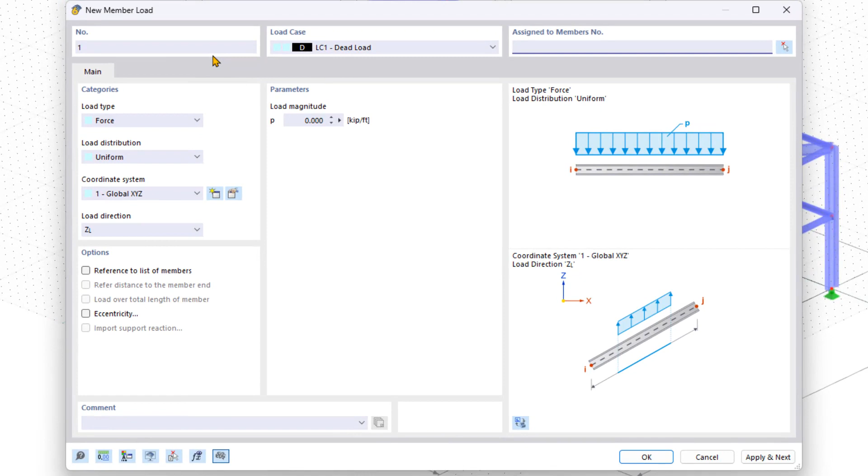You can do this by clicking the New Member Load button, and the selected load case from the list is imported into the New Member Load dialog box by default, but you can change it retroactively. In the Categories section, you can customize the load properties. There are additional options below this, such as eccentricities as well. In the Parameters area, you enter the desired load size and confirm it by clicking OK.

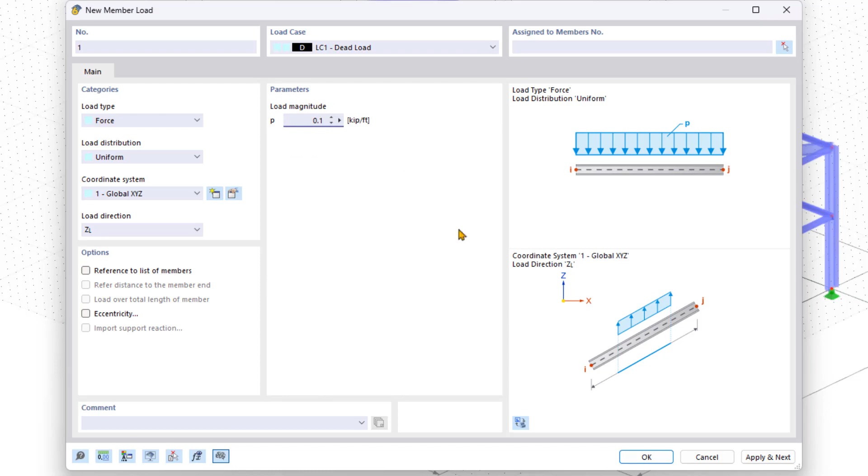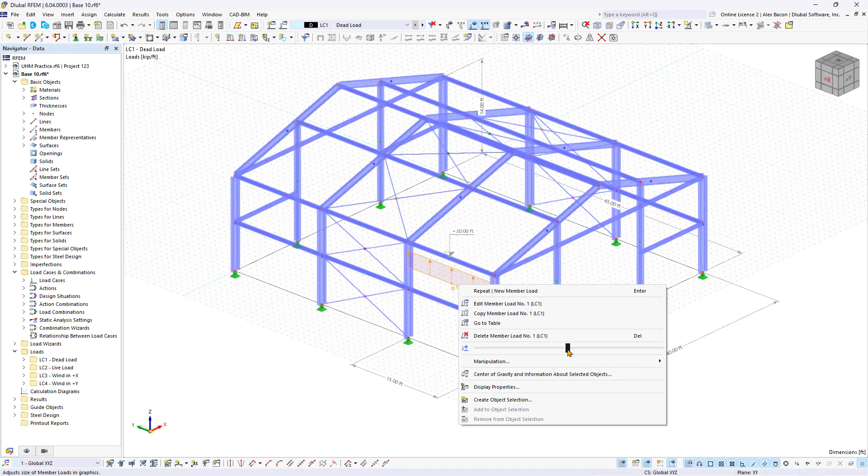Select the members in the structural model to which you want to apply the member load and confirm again by clicking OK. And adjust the display size of the load with the controller in the shortcut menu, as well as double-click on the load to edit it and change anything you'd like.

Since the self-weight load case acts on the entire model, we'll now delete the member load that we just created and use a load wizard to create several loads for the steel hall simultaneously. We can expand the load wizard in the data navigator and double-click on member loads from area load. This way, surface loads can be automatically converted into member loads.

As usual, this dialog box consists of a list of available load wizards on the left, properties and options in the middle, and bitmaps on the right. Start by selecting the correct load case from the list. Use the symbols to the right of the list to create new load cases directly in this window, or edit the selected one.

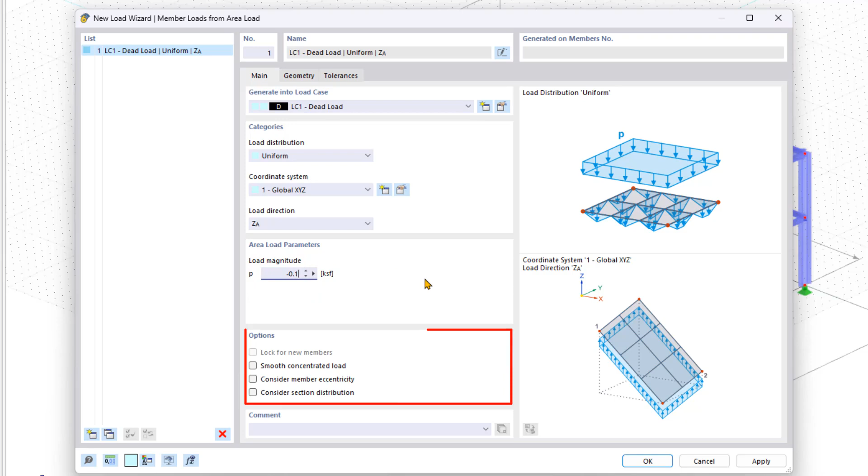In the Categories area, set the correct parameters for the respective load. The bitmaps on the right adapt immediately to the new properties. For the load size, add the corresponding value. You can find further options for this load wizard below that you can activate, and we'll leave them at the default setting. Now, we'll move to the Geometry tab.

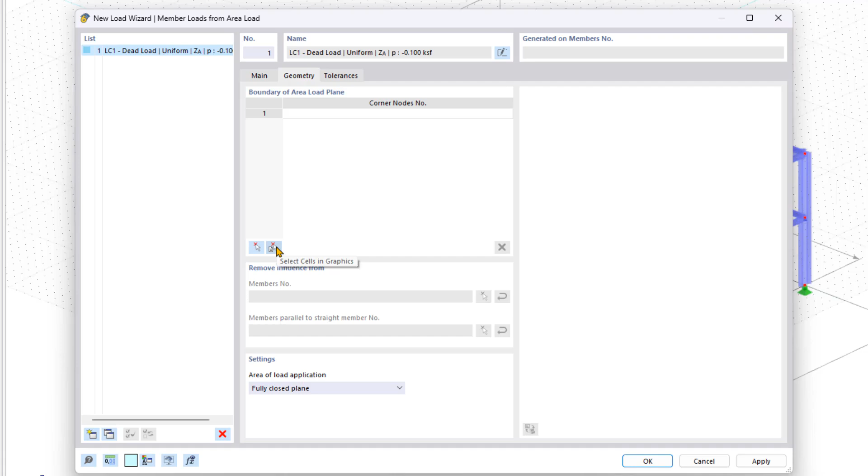You have two options for applying the loads to the steel hall. Depending on the command selected, you either define a plane via corner nodes or select cells in the graphics. Click on Select Cells in Graphics and draw a selection window over the entire structural model. You can deselect the relevant cells by holding down the Shift key on the keyboard.

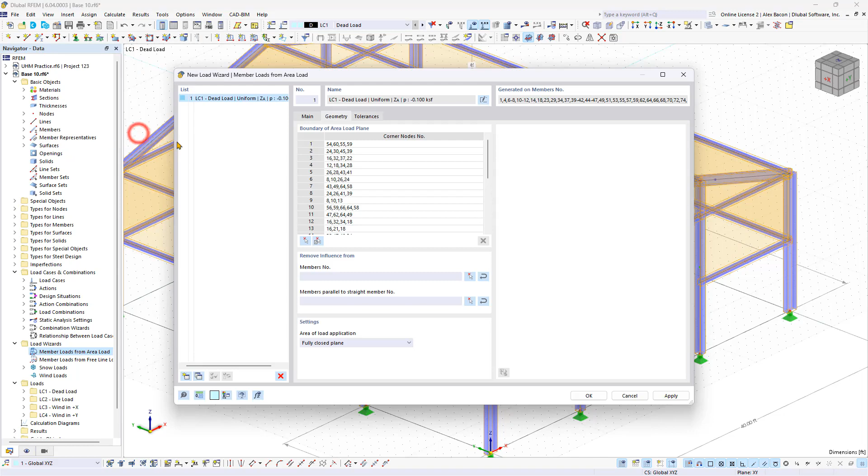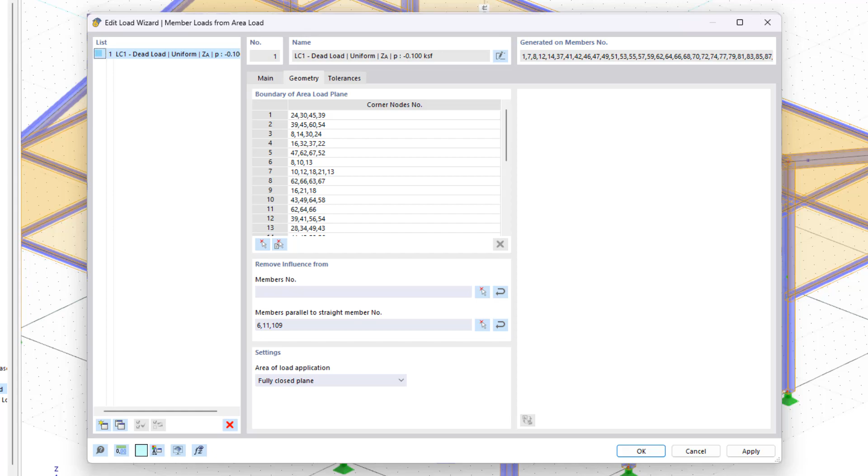Once satisfied with the input, confirm it by clicking OK, and you'll see all the selected surfaces listed. You can also exclude certain members from this loading by clicking on Members Parallel to Straight Member and selecting the desired member in the steel hall. Confirm the dialog box by clicking OK, and you'll now see the inserted loads on the structural model.

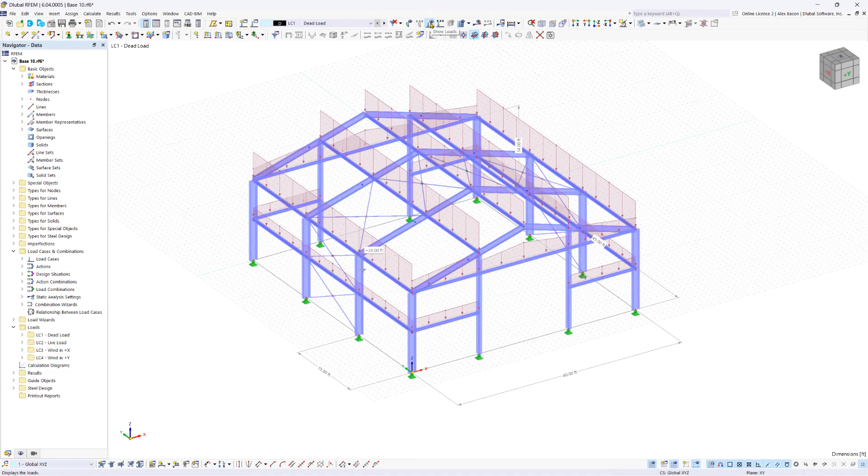To display the load distribution, right-click on the loads. Additionally, you can hide the load values or even the entire load using the respective buttons in the toolbar. In the dead load case, we've inserted the complete loading. In the next video, we'll explore other load wizards.